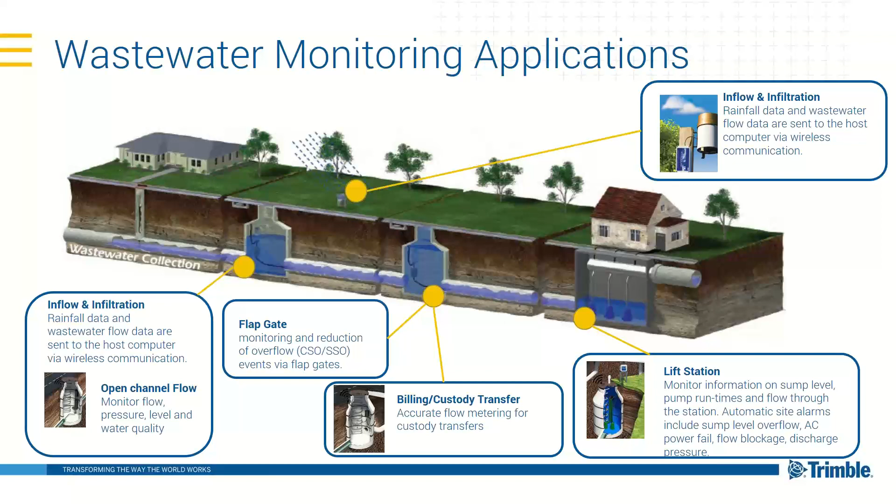So how do we do it? Well, I mentioned Telog. Telog has been the market leader since 1984 as it relates to IoT and remote monitoring. We create technology that is wireless. It's very rugged, battery operated, cellular technology to go out into all of those applications that I just described and bring that data back to you, so you don't have to go out to the field to get that data.

It's all about real-time situational awareness, giving you the ability to minimize or mitigate CSOs and SSOs and other environmental impacts. For example, and we'll talk more about this as we move along, if you have a CSO site that you're monitoring, we have technology that's easy to install to give you a multi-threshold level alarm in that CSO site to notify you that as a storm is passing through, you'll get an alarm at the first critical point, then at the second critical point, and then at the most critical point.

You'll get multi-threshold alarms to help you understand when and where you may need to deploy a crew to ensure that you don't have some type of event where there would be an environmental impact. And we focus across the water cycle, as you'll see in a coming slide. But at the end of the day, this technology is all about optimizing operations, streamlining your asset management process, and giving you a true understanding of your asset performance.

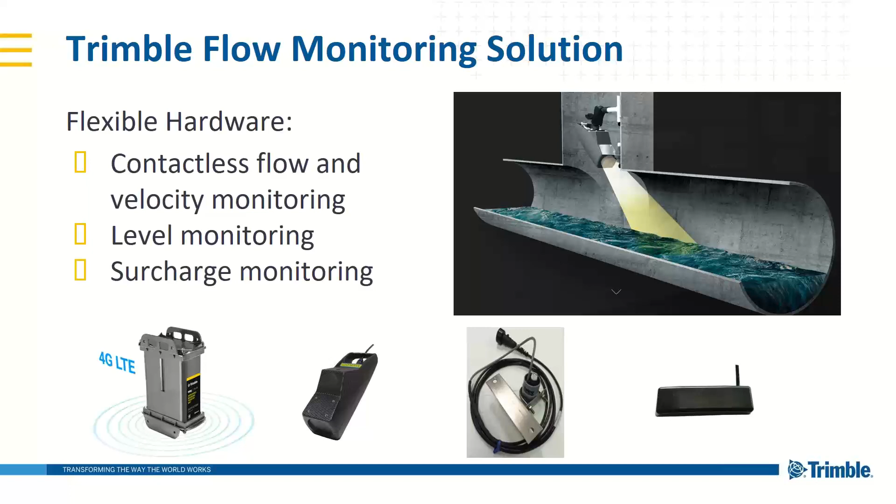So what is the Raven Eye specifically? The Raven Eye is a non-contact open channel smart radar sensor. That device projects a radar beam from above the flow down to the flow to give us back flow information. It's a technically advanced radar system. So every time you may have been driving down a village street and one of those signs that says speed limit 30 shows how you're really going 40, or maybe it's really me who's going 40, and you have to slow down because it's blinking red at you, that's a radar system. This is operating in a very similar manner, except we focused it on wastewater application instead of on how fast I'm driving my car.

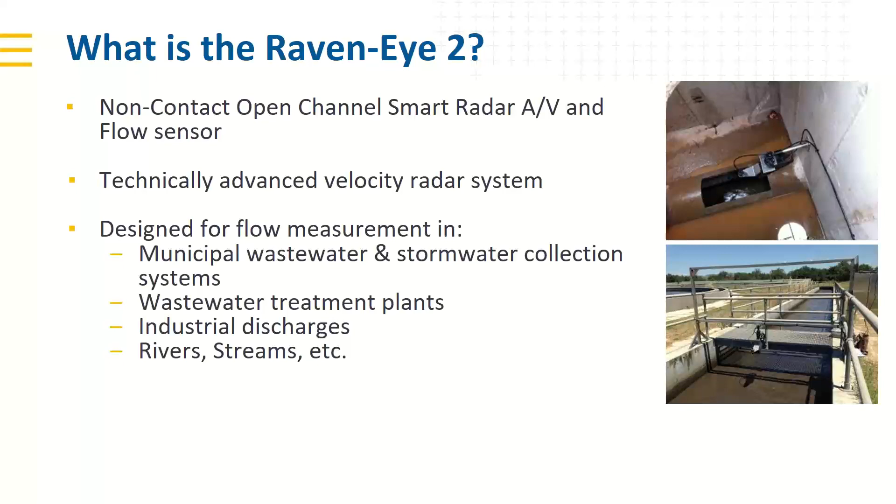This solution is designed specifically for flow measurements really across the water cycle, but really specifically into municipal wastewater and stormwater collection systems. It's great in wastewater treatment plants. It could also be used in industrial applications or rivers and streams too. So anywhere where you're looking to get a flow measurement, this is an excellent way to do that. It's really perfect for normal and difficult flow conditions. So any of you on the call here that may have applications where you have high solid content, or you have high temperatures, or you have shallow and caustic flows.

Some of my folks in different parts of the country have really shallow flow but high velocities. When you're putting a sensor in the pipe, you're getting what's called rooster tailing. In other words, the water is hitting the sensor in the bottom of the pipe and flying over top of it, giving you an inaccurate measurement on what's actually happening. We solve that with this device because it's not in the flow, it's monitoring the flow from above using radar.

Another thing this is great at is very large pipes. So we have folks that use this on the influent and effluent in and out of their treatment plants, or extremely large pipes. This works great, as well as low water levels. This is a solution that's been proven worldwide. There are thousands and thousands of these devices installed all across the world, and it's a very key piece of the Trimble flow monitoring kit that we provide to the market.

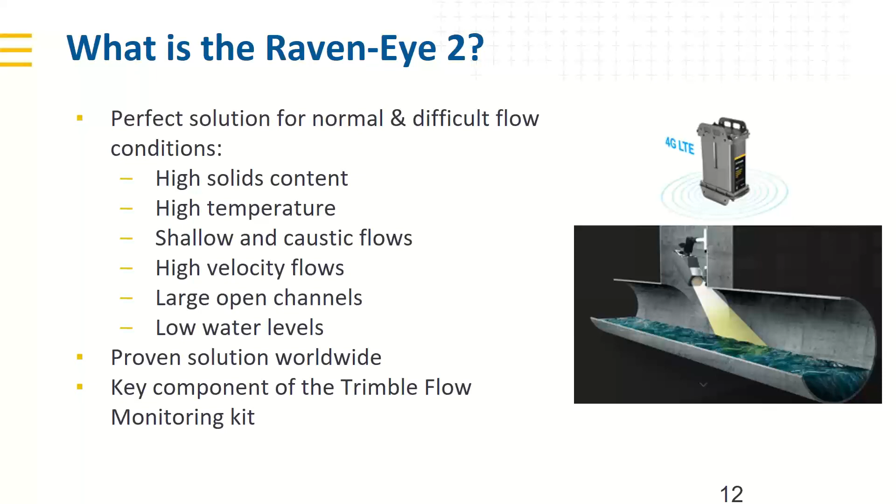So what are some of the values that it brings? It's designed not only for regular sites, but also challenging sites. This thing can work almost anywhere. That's a benefit because once your crews get used to installing devices like this, it's very quick and very easy to get it up and running.

Again, it's contactless, so it never touches the water. That equals low or virtually zero maintenance. Once you're putting this device in a manhole or some other application, there is no maintenance on the device. It just works, which equates to a single entry. Once this thing is installed, you don't really have to visit it. The device has the smarts to let us know if there's some sort of issue that would require you to visit the field. But you don't have to go out to the field and worry about ragging on a sensor, or whether the sensor's been ripped out of the pipe because of really strong velocity or something like that. This doesn't have any of those issues.

Very accurate, plus or minus 5%, but actually much better than that. We spec it at effectively what is the industry standard for flow monitoring. We also offer bidirectional flows. Why is this important? Well, if there's a blockage and for some reason flow starts going the other way, that's a really bad thing, and we can alert you of that as soon as it happens. So you and your customers are not surprised, and you make sure that nobody's basements are getting backed up or anything like that. I mentioned it's battery operated.

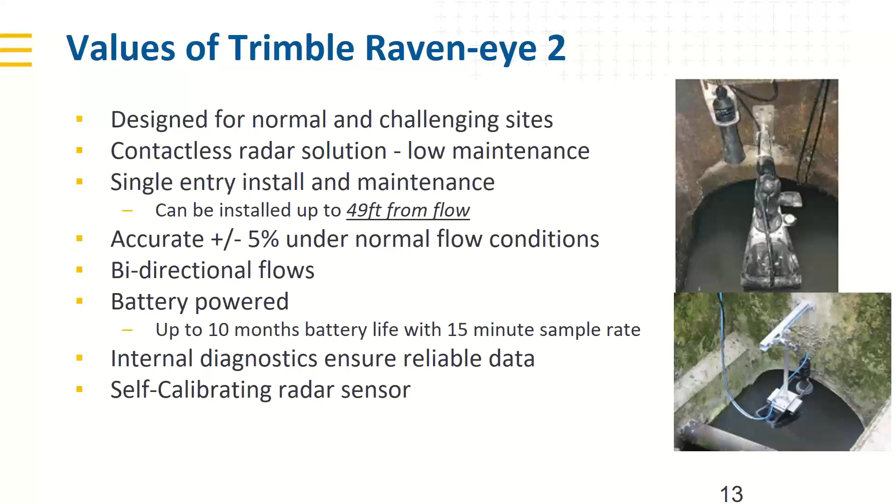I also mentioned internal diagnostics, and it's self-calibrating. So what does that mean? It's basically machine learning. Once this device is installed, it learns the flow pattern, and it'll self-calibrate the radar sensor to ensure that it's giving us the most accurate readings that it can. And this is actually patented, so we're the only ones that have that.

Some other key features: it's also not affected by floating objects and high solids. Sometimes in the flow, these high solids or just standard floating objects can give other types of technology on the market false positives of different types of flows. It's also not influenced by changing turbidity because it's a self-learning sensor.

It has an incredibly quick measurement cycle. It wakes up, takes a sample of roughly 25 seconds, and in that time it's taking thousands of data points. That equals very accurate measurement.

Low power consumption, it's IP68 rated. What does that mean? Well, differently than other technology on the market, there are no joints, no seals or screws or O-rings that you may need to maintain. Other sensors on the market require you to do certain types of maintenance to keep that type of rating. That's not the case with the Raven Eye.

We offer it with a standard warranty of 1 year, but it is expandable up to 5 years as well.

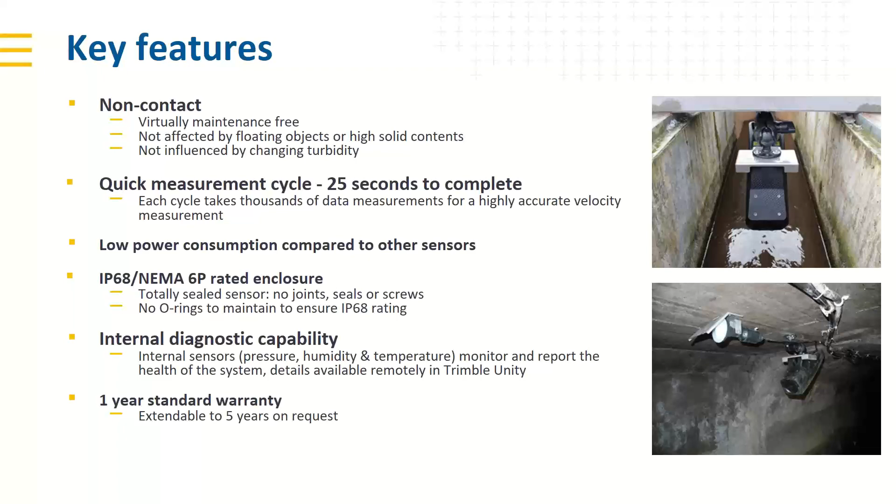The personnel have minimum contact with the flow. It's a one-time entry, a one-time install. No site calibration is required. And it's got a 35-degree viewing angle, which makes it perfect for almost any site. It can also shoot from 49 feet above the flow. So in spots, especially industrial applications or other spots, maybe in a river or a stream, where you may put the sensor very high up, like on a bridge or something, we can shoot down 49 feet and get that accurate measurement as well.

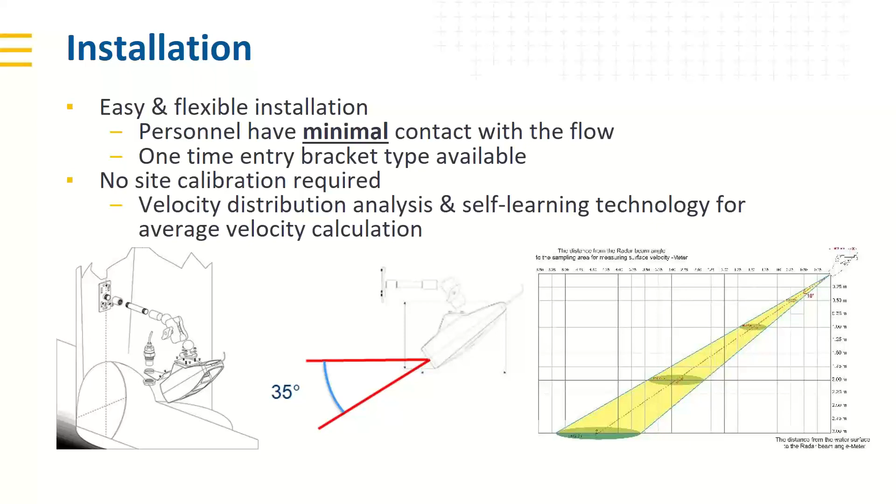So when you think about a pump station and a pump panel, it's very common to have things like sensors that provide a 4 to 20 milliamp output, or a 0 to 5 volt output, or something similar. This device here can accept up to 30 of those types of channels. So we can monitor virtually anything inside of even very large pump stations, bring them into this device, and do the same type of smart data logging, but only for a whole bunch of different parameters.

We have people here that monitor pump runtimes. They monitor the wet well level. They monitor amperage. They monitor groundwater, generator kicking on. You name it, we can log it with this device.

We have our RU32 device, which is the same one that I showed up in the vault earlier. This one also has universal inputs and can take in less amounts, but a couple 4 to 20s or a voltage, and it's a very quick and easy installation. It's really designed around level monitoring in a manhole. It's also used commonly for discharge pressure monitoring out of a lift station or a pump station as well.

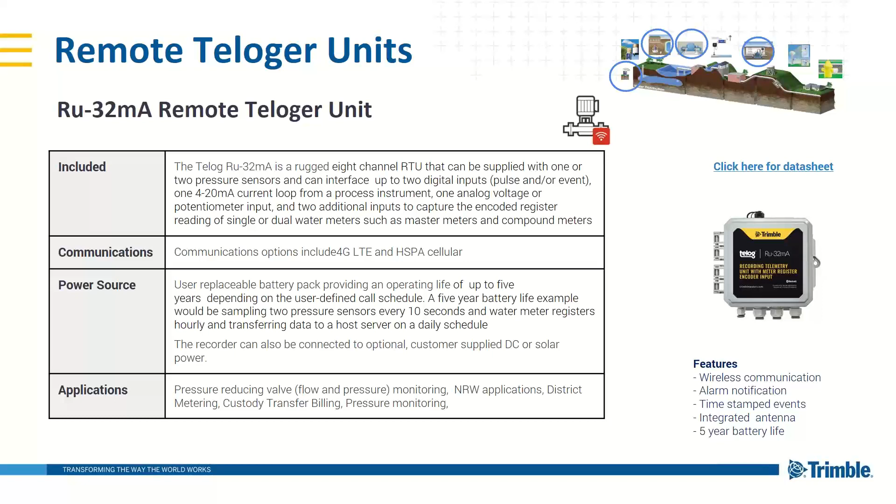We also have folks that bring in other types of channels into this. So this can accept a pulse or effectively a dry contact into it, and then we can scale it appropriately for whatever that sensor might be into our system.

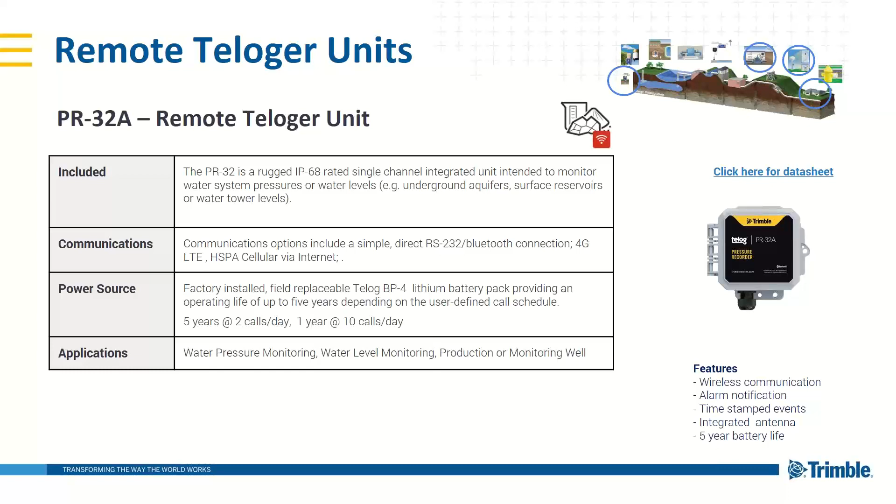Our PR32, so this device is focused around pressure monitoring. In a collection system application, it's used most often for discharge pressure out of a lift station. Again, a single channel pressure monitoring device.

Our RS33U unit. So this device is also highly flexible and used throughout the collection system. It does a lot of different things. It can connect up to virtually any flow meter on the market. So if you have any existing flow meters that you may be driving to today or sending personnel out to today to collect some information on paper, this device can probably connect up to it and bring that data back remotely using the cellular technology that I've spoken about today.

This device, though, kind of takes it a step further. We can also connect up to PLCs. So if you have a PLC or some other type of Modbus device out in the field, this device can read that Modbus up to 14 different registers and bring that data back to our system as well.

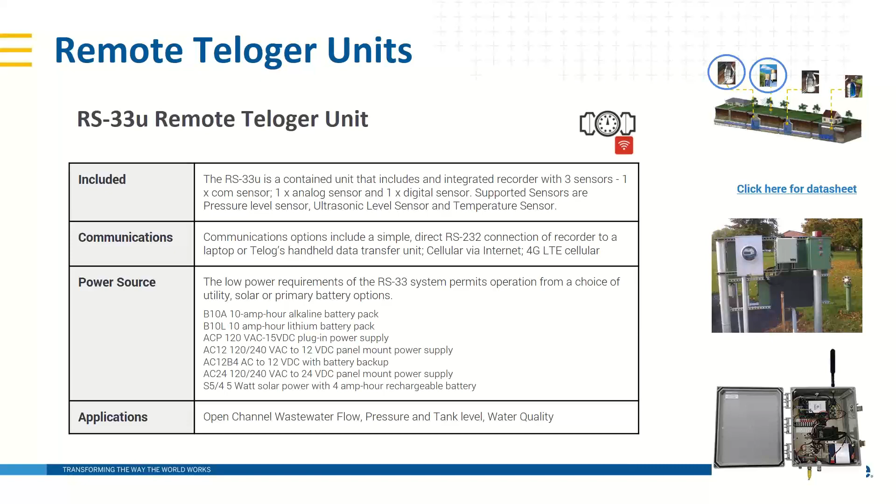This is really the big workhorse around the wastewater side. So this is our RU35. You saw a picture of it earlier as we were talking about the Raven Eye. This device is really focused around nearly every application across the collection system. Why is that a benefit? Again, because you are using a single device for multiple things. Your crews get used to it. They know how to maintain it, change the batteries and other types of things. So it can do a whole bunch of different stuff.

This also connects up to virtually any open channel flow meter on the market. So again, if you have flow meters in your fleet that are logging data for you out in the field, but you have to go out to the site to collect that data, we can bring that data remotely back to you by connecting one of these devices to that flow meter. Consequently, we can also provide you our flow metering solution, which is this device plus the Raven Eye we spoke about, and a couple other sensors that we offer as well.

This system can also monitor for water quality. We offer a conductivity sensor. We can do level monitoring with this device. You can put multiple different sensors connected up to a single RTU, again, with all of that battery-operated wireless technology.

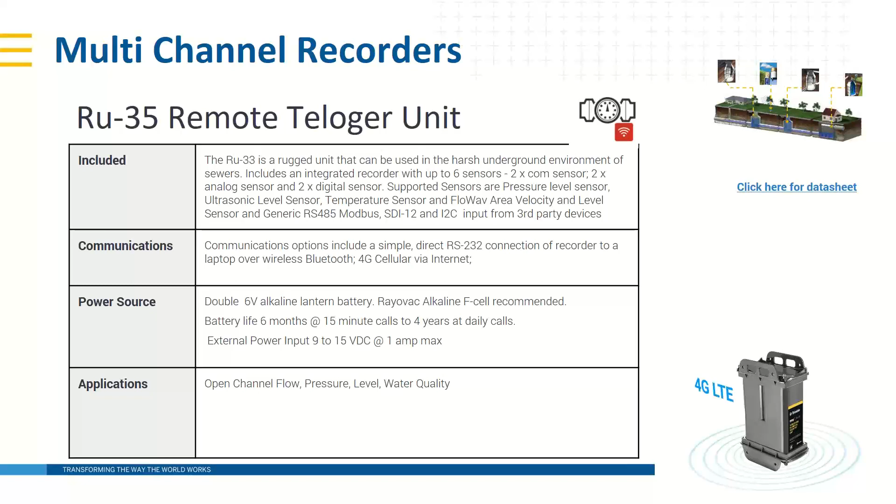And this runs, by the way, on 2 Lantern batteries. So there are no proprietary batteries with this device. You can go to a Lowe's or a Home Depot or wherever and replace with Lantern batteries right off the shelf.

This device can connect up to a bunch of other different sensors too, some that we provide and some that you may already have. You can connect up a pressure level sensor to this device and monitor for level that way. You could put an ultrasonic level sensor and connect up. We provide one, and if you have one that provides an industry standard output, like a 4 to 20, we can bring that in.

We do offer an in-pipe sensor as well. Sometimes an in-pipe sensor is a great solution for a flow monitoring application, and we provide that. You could connect up all 3 of those devices to the RU35 if you wanted to. And then there's a whole bunch of other sensors on the market, all supported by our RU35 device. So other competitive flow monitoring technology from other manufacturers, we can plug them into the 35, and we have specified cables for virtually every flow meter on the market.

We do water quality monitoring beyond conductivity by connecting up to sondes and other types of water quality devices. So we have standard applications for that as well. Ultimately, the message is, if you have a sensor in the field that you want information back from, we have a solution for it.

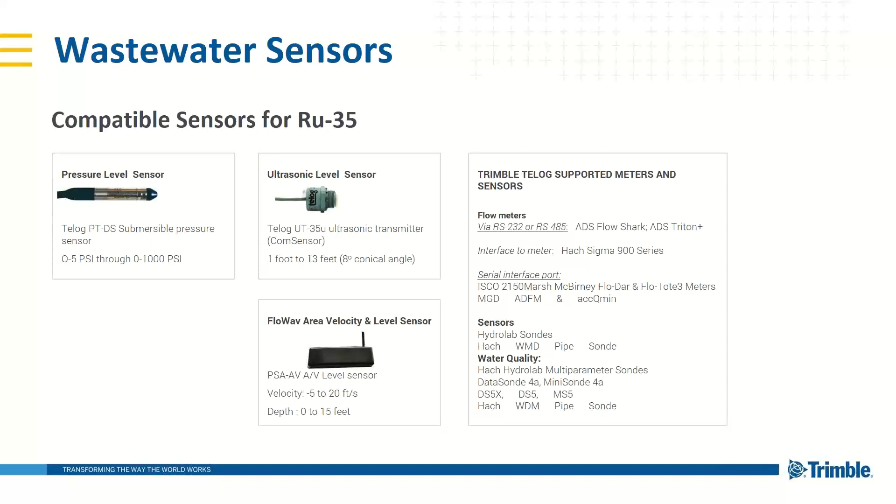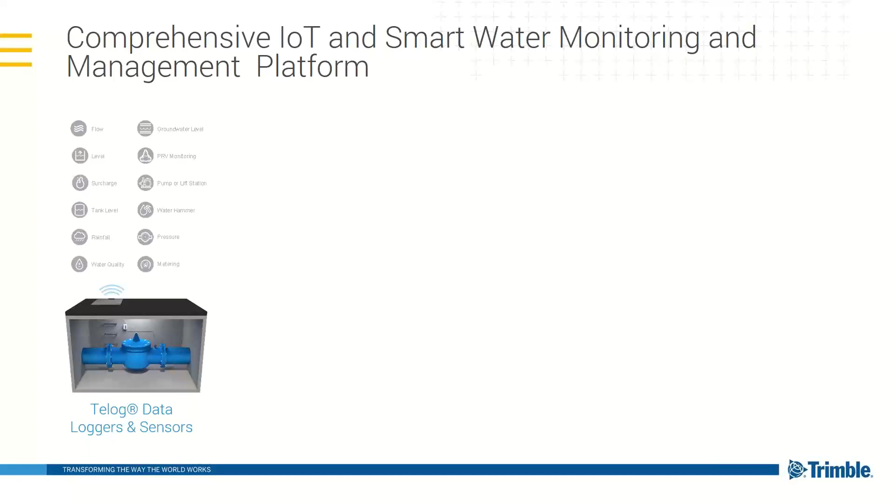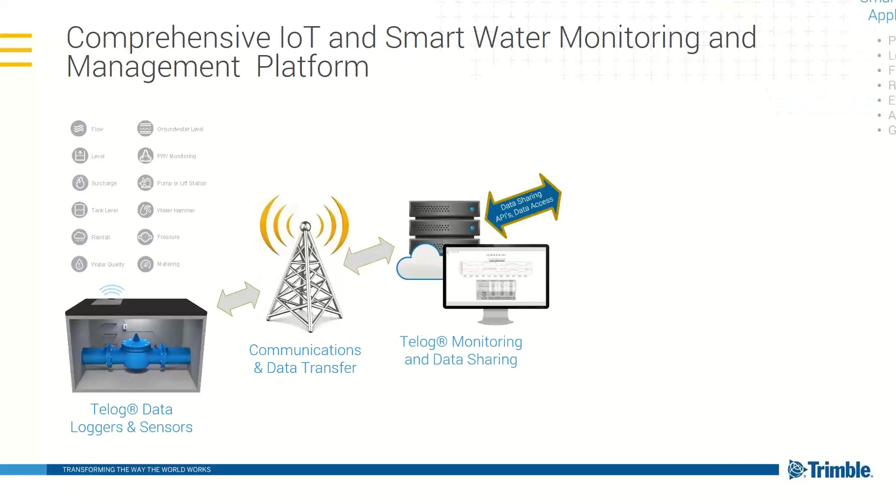So to kind of summarize the hardware, it really all starts with the Telog devices in the field. Regardless of the application, water or wastewater, rugged or in an enclosure, in a lift station, wherever it may be, out in the collection system, we have a specified piece of technology to get that data and bring it back for you. And we do it over the cellular technology. So all the devices have built-in wireless cellular modems. The data is collected in the field, then transmitted over cellular technology back to our back-end system, which ultimately goes to our Trimble Unity platform.

I'm going to transition into software in a moment, but I just wanted to pause and see if there are any questions related to hardware that I can answer right now. So far, I don't see anything in the chat window here, but anybody feel free to shout out and give us a question, and Kerry's happy to answer them for you.

All right, we'll keep on trucking, but as I mentioned, please feel free to ask any questions at all. So we'll get into software a little bit.

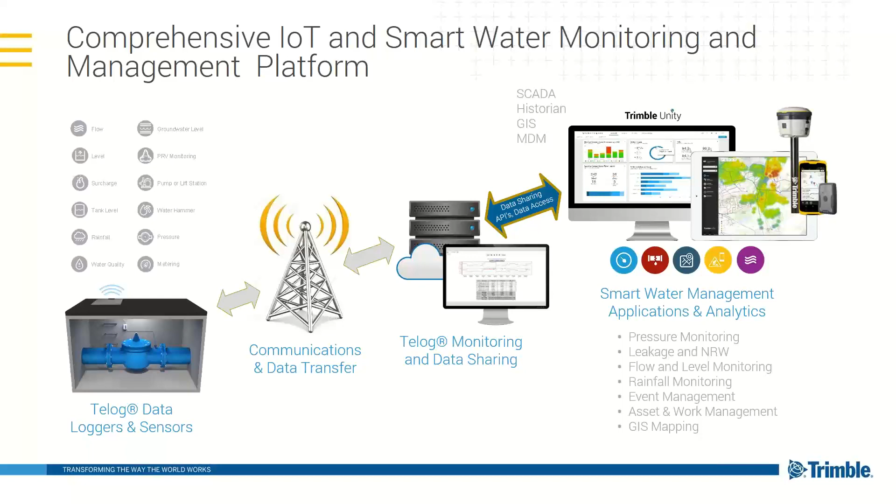Any good piece of hardware is only as good as the software that supports it. You can have the best piece of hardware out in the field, but if you're not getting data back easily and having a software system that allows you to display that data, create reports and other types of things, the piece of hardware is not bringing you a lot of value. Trimble Water is really proud to offer a complete system from all the hardware I've spoken about, but also with a very robust software, called Trimble Unity.

Our Trimble Unity platform starts out with a system health dashboard where all of the data, all of the health of the network, the RTUs themselves, are reported. So you can see your battery statuses, any active alarms, your call statuses, and other types of things in one easy to use dashboard. Unity also gives you the ability to create and manage your own reports.

So perhaps you're in the operations department and you'd like to create reports that are pertinent to your job, but the engineering team would like to use that data in a different way. You can create these reports, customize them however you like, and share them however you like as well.

You can view, filter, and group all of your sites, and it's all done in a GIS-centric view. So we integrate directly with Esri ArcGIS. Our system is integrated directly with that. So if you have a GIS system, we're going to be able to integrate directly with that, bringing in any of your layers and any GIS data to make the data we're collecting and providing for you even more actionable and powerful. All of our devices are capable of providing multi-threshold alarms, as I've mentioned.

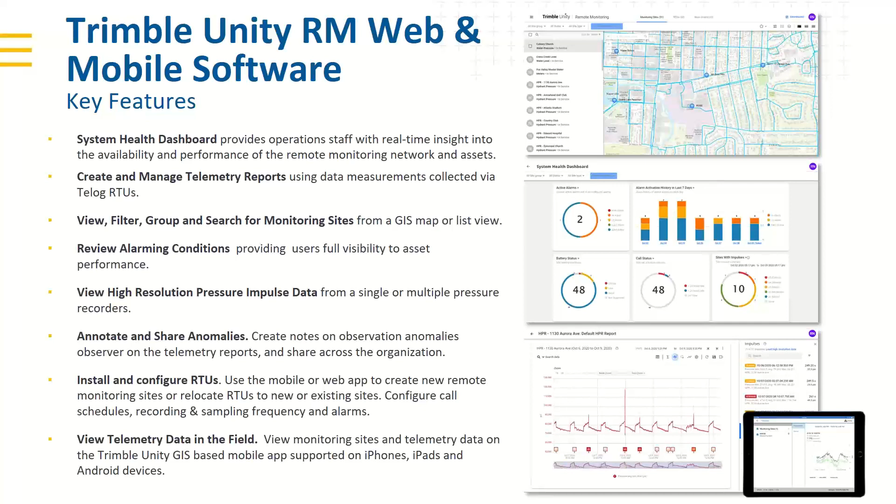And of course, Trimble Unity is not only a cloud-based platform, but it's also a mobile application. So it's essentially agnostic to what type of device you want to use, whether it's an iPhone or iPad, or it's an Android device, or even Windows. Unity works on all of them. And not only is it a website that conforms to your mobile device, it's an actual application. You can go to your app store right now and download Trimble Unity. It's a legit app.

This could be high flow events or CSO events or lift station activity or really whatever else you would want. And this gives you the tools using pre-canned KPIs to make this data more actionable across your organization. And you can even provide analysis and insights on this data as well using this connector. So this is a pretty powerful piece of our software that's an add-on for folks that are interested.

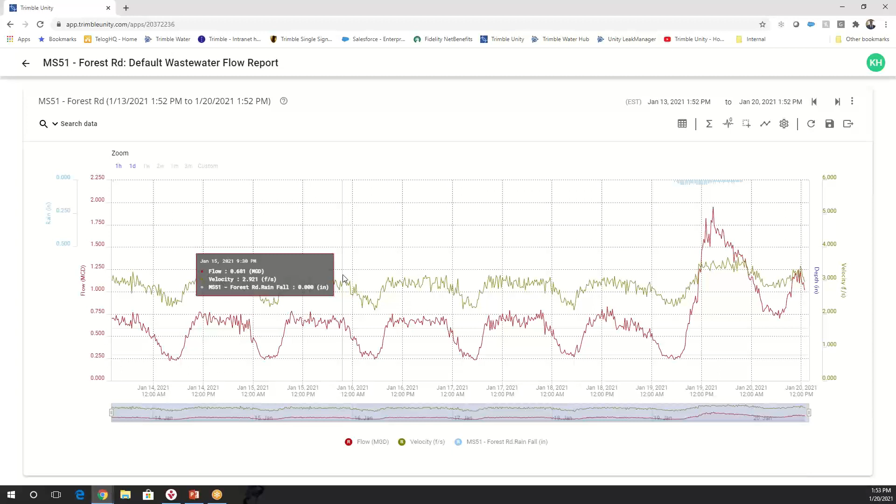There we go. So again, this is basically a week's worth of data. We can see right here that I've defaulted it to a week. I've got my metrics here: flow, velocity, rainfall. And as I track across the screen, the numbers change with me. I see I've got a little bit of a peak here, and we can see we had some rain. So that's expected.

And I can zoom in to that little bit of a peak that we had. And I could say, geez, it'd be awful nice if I could look at this, not just on a graph, but actually see what those numbers were. Well, good news, you can. So I can click on View Table, and now I can hover over top of this top part, and it'll actually highlight for me down in the table what our peak was in this part of the system. And when I'm done with the table, I can just turn that table right off.

I could do some other stuff too. So I can just reset here, and I could say, well, this is a week's worth of data. I really am only interested in yesterday, so I'm just going to click yesterday instead. And now it's essentially going to give me the last 24 hours that I just asked for. And there's all of these pre-canned times that you can select and see what you'd like here.

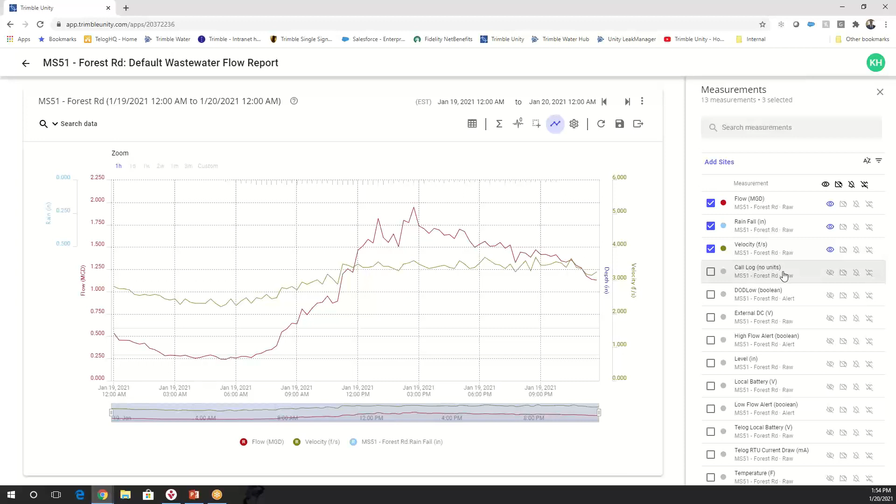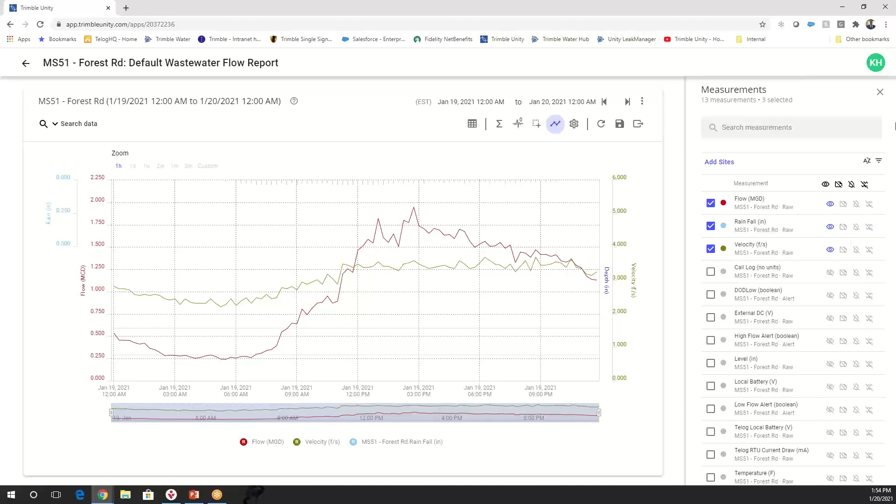There's a lot more going on at this site though than just looking at the metrics that I have. In fact, we could look at all of the measurements and see that this is what I had selected for my default report, but there's a lot more stuff going on here. I've got another level measurement. I've got the external power here. I've got low flows. I got temperature. I have all sorts of things that I could bring in and add to this report very quickly and very easily. So this is just a single click right from one site.

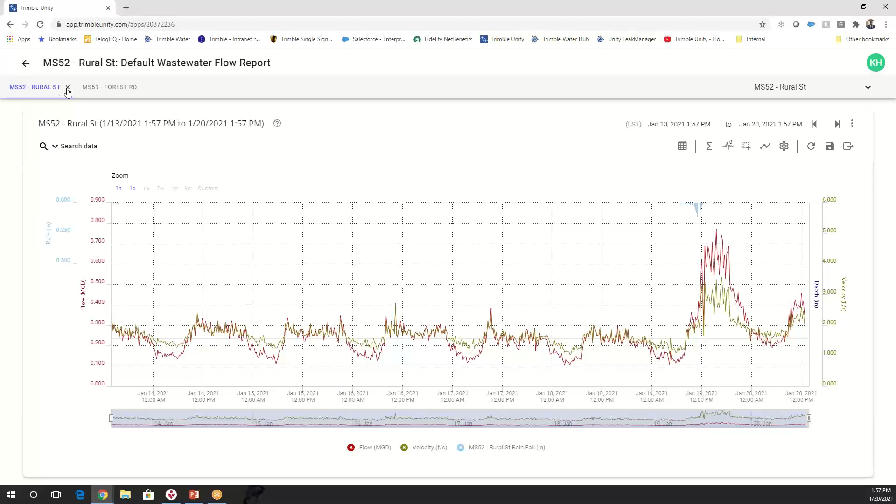Well, I looked at Indian Trail, I'm good. Let's look at Rural Street, okay? We'll bring up the same default report on Rural Street. Well, look at that peak over there. That storm affected the system a little bit differently here. But I love that question, Tommy. That's the right question. I just happened to see that in my peripheral, and that's the right question.

You like this report? Okay, good, me too. I can export it. I can download a CSV. I can save the picture of this. I can download an Excel file, whatever you need. Or if you say, this is a report I'm going to use every day and I want to just click it one time, well, I can save it. I can say I want to save this as, I'll give it a title, I'm going to call it Tommy's report because he asked a good question.

And I can save this as a site, or I can save it as a template. Now, in my case, I only selected site, but if I wanted to do it as a template, that means I could apply the same report over any site with the same type of information, and you'd have this report usable across the organization.

All right. That's a lot of stuff. I wanted to save the last 2 minutes for any other questions. Happy to, and I know York, you can certainly jump in. I know there's been other demonstrations on our Trimble Unity platform. I'm really only scratching the surface here. But as I mentioned before, a piece of hardware is only as good as the software that supports it. We're really proud of this software, and it does a lot of stuff. We'd certainly be happy to dig in deeper for anyone that would like more information.